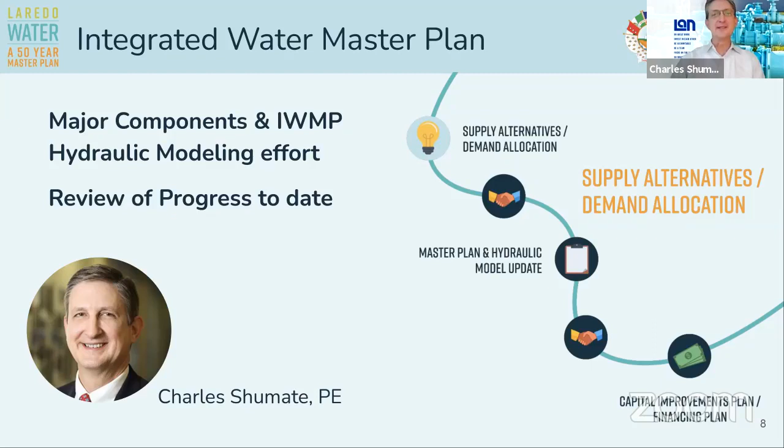Let's go on to the next slide. There we go. We'll talk a little about the major components of a master plan. I'm specifically going to talk about the hydraulic modeling effort, and then all of the speakers this evening are going to talk about the status of and progress on their tasks.

A little background on the city system and the current effort. The system originated or had its beginnings about 140 years ago now. It's a primary consideration, I guess, that the Rio Grande River is essentially the supply for the city. Groundwater gets only pretty limited use because it's limited both in quantity and in quality.

The current master planning effort goes back to 2011, which was the last published master plan, I believe. The 2015 update doesn't include all the aspects of a master plan, but it was a major update of the modeling efforts. And then emphasized in the current planning is that we make use of those Water Development Board planning projections for both population and future water demand. And if you're not aware, Laredo is in Region M of the state's planning effort.

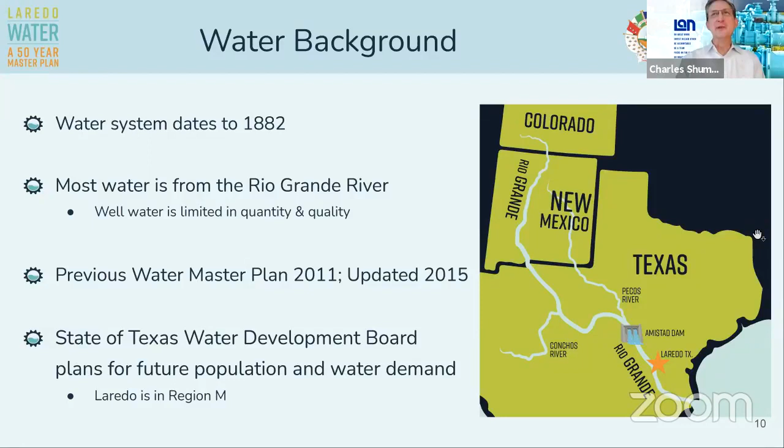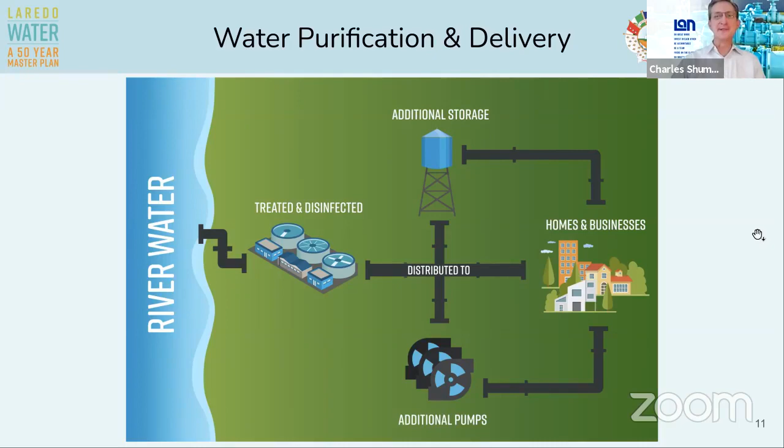And at the top there, you may also have additional storage out in the system. So in the city system today - and these numbers have changed in recent years with the El Pico treatment plant coming into service - the city now operates 2 surface water treatment plants. There are 8 booster pump stations, 9 elevated storage tanks, and with the 2 treatment plant service areas and 8 booster pump station service areas, there are a total of 10. Part of what helps define those service areas are some PRVs out in the system, and isolation valves also help form boundaries for those service areas. And then finally, just the piping out in the system - there's more than 1,000 miles of water lines that range in size from 2 inches up to 60-inch transmission mains.

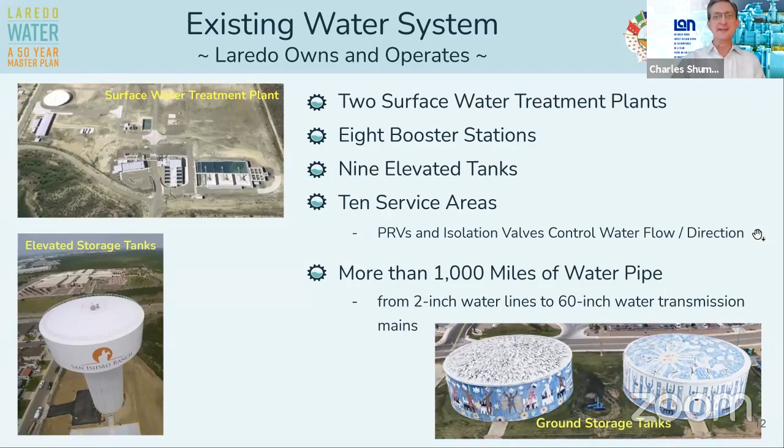When I start talking about hydraulic modeling, I'd often start with population and water demand, but Tom is going to pick that up here in a little bit as he talks about planning for the future more, and those population and water demand projections, and that need for additional water supplies.

But really, all a computer or a water model is, is a computer simulation of that infrastructure out in the system - both what you see above ground and what you don't see, with the water lines underground. It's a tool to identify needs, or kind of a what-if tool many times. If there's a disruption in supply, or a break in a line, or just not enough capacity somewhere, it allows you to test potential improvements - whatever the engineer can brainstorm or sees a need for.

With storage, it helps you locate where in the system it needs to be and how much storage. With pumps, it's about capacity and their operating or performance requirements - how much pressure do they need to provide. With water lines, again, it can be connecting from point A to point B and how large that line needs to be. And then operational changes can come out of the modeling effort as well - knowing when to turn pumps on and off, how they're controlled by levels in tanks or pressures out in the system, those kind of things.

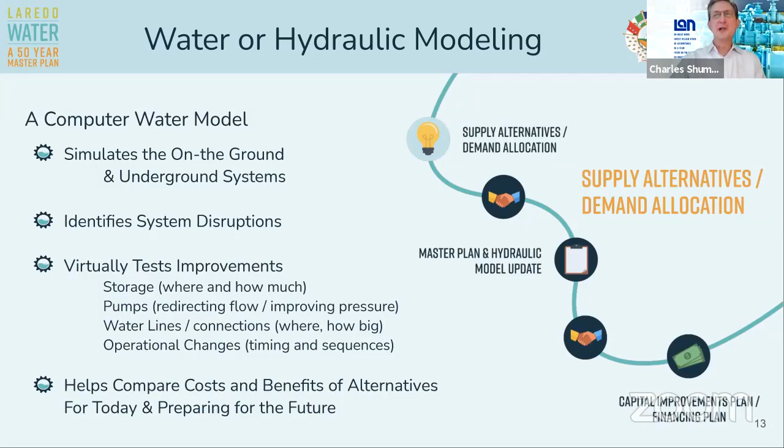So kind of, how did we begin? Steps we've been through - where are we now, where are we going? As I've mentioned, that 2015 model update formed the basis for where our work began. It did take some updates, both in terms of addressing development in the system in the last 5 to 6 years - so adding some pipes in those developments, as well as new demand in the model. I mentioned changes that have come about with El Pico coming into service, so there were booster pump stations in the model that no longer need to function.

A major step or task then in the overall process is verifying that model - just making sure that model results match what you see out in the system day to day. And you do that just by looking at flows and pressures in the system, comparing SCADA data for tank levels with model results. And a big part of getting those things to work and come into agreement is just getting pump controls right.

Once you have a verified model, then you take that and apply it to the existing system - the way the system operates day to day, and peak days especially, and all of its shortcomings potentially. What we see agrees with what city staff tells us about needs out in the system, from growth in South Laredo, just challenges at times to refill storage. And another thing we look at is just, are there ways we can simplify operation or make things more efficient? And then finally, again, kind of back to cost - we want to be able to identify those efficient and affordable improvements.

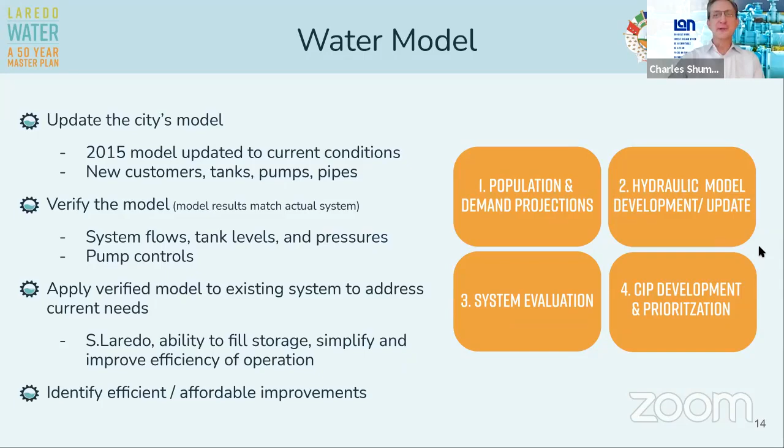So what does this all look like when we're finished? Well, the final master plan report really just documents the things we've been talking about. It goes back to the development of the model, bringing it up to date, the needs identified in the existing system with capacity, pressure, and storage. Then documentation of proposed capital improvements and the comparison of alternatives, what won out as the best solutions to the needs, both short-term and long-term, and finally developing those conceptual or planning level costs.

That's a key part of the comparison of those alternatives. You want things to be both dynamic and updatable and actionable, things that city staff can go then and begin to implement.

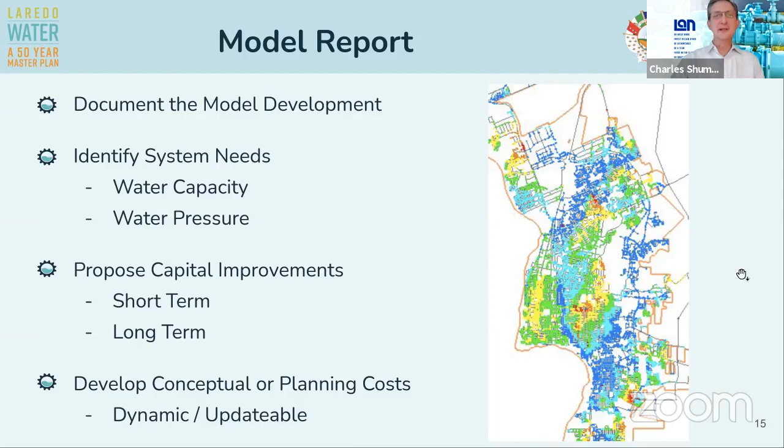There's also the likelihood of potential plant improvements. Those are things always in the city CIP, so meshing those with model results and getting into agreement about priorities for those. And then also pump station improvements, some of that's about operation, and some of it's really about getting a better handle on and control of getting enough supply to booster pump station facilities where it's needed.

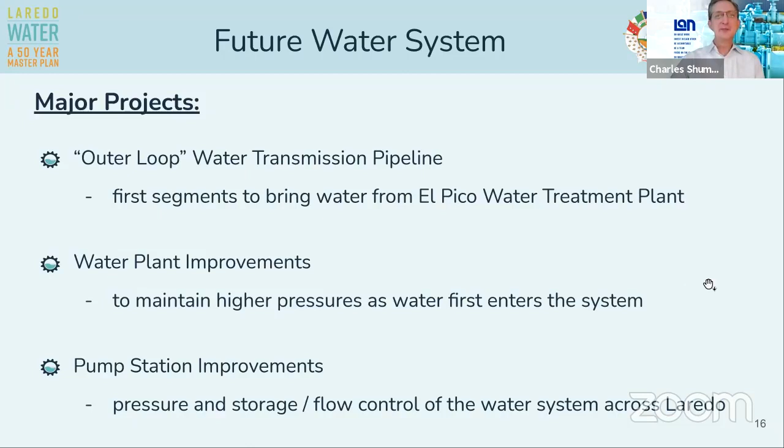And I believe that brings me to the point where I hand it back to Tom, who's going to talk about water supply alternatives.

Okay, Charles, thank you. I appreciate that. I've got some help today from Tom Mountz, and Tom has done a lot of work on a number of water supply alternatives. Also on our panel is Mike Thornhill of the Thornhill Group. He is a groundwater hydrologist, and when we get to talking about the groundwater alternatives we've looked at, Mike will be available to help us answer questions and get through that with the information you need to know about groundwater alternatives. As Russ mentioned, the Laredo—and I apologize, Russ, for not recognizing you, that's a major slip up, but Russ is very valuable to our team.

But as he mentioned, the Laredo integrated water master plan goes beyond the typical standard master plan in that it looks at water demands in the future that will be needed to meet the growth of Laredo, as well as an alternative to look at what happens if Laredo were to lose its primary water source, which is the Rio Grande. So we'll be talking about that in terms of the alternatives.

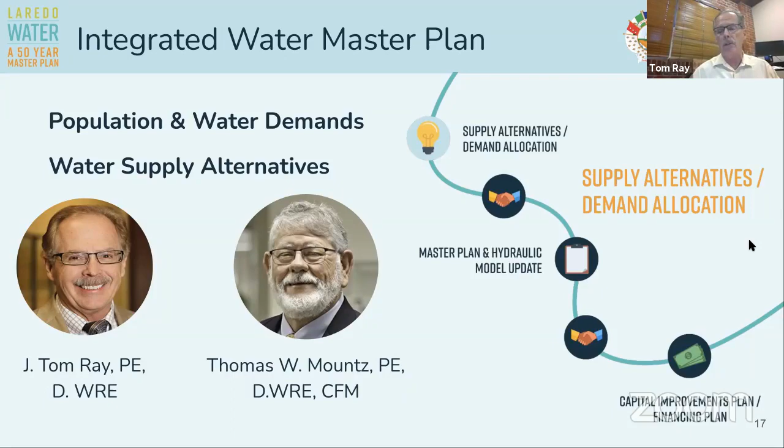Let's move on to the next slide, which gives you a little bit of background about where we got our information. What we were using for population and water demand is information from the Region M water supply plan, the regional plan for this area. It's part of an overall statewide effort that's been in place since the mid-90s. The city, RIA, and others are actively involved—RIA is actually a member of the Region M Water Planning Group, and they've had great input in the alternatives included in the plan, and have also looked over some of these numbers that we'll be presenting in just a minute.

We did gather information from existing water supply sources, with documentation and references as well. We looked at projected demands in two categories, which we'll speak about over the next couple of slides. First, the supplemental water supply goals for the city—that's the amount of additional water supply needed by the city to meet its growth needs through the year 2070, a 50-year projection of the city's growth, which is very typical, very standard practice. Not many cities achieve that as well as Laredo, but that's the supplemental supply goal we'll be looking at. The other is emergency supplies: if the city of Laredo loses its main source of supply at the Rio Grande, what sources could they call on to make it through an interim need until the Rio Grande is reestablished?

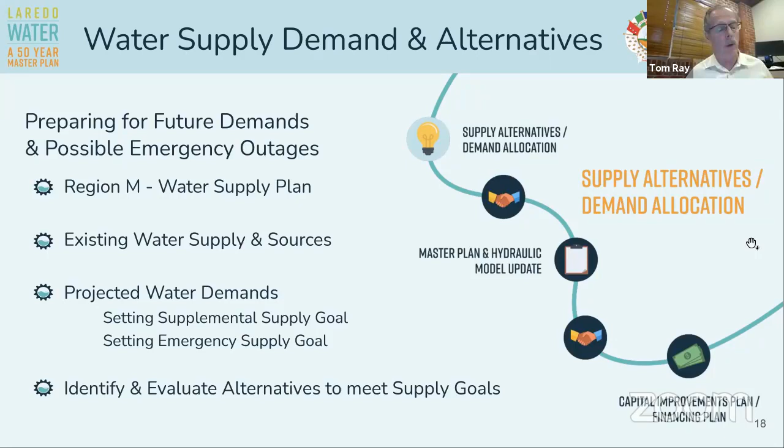So looking at that, we've identified some alternatives. I want to go through those with you now. If you'll take the next slide, please.

Okay, this is the population demands straight out of the Region M plan. Gene and his team have done a very good job of illustrating the growth that we anticipate for Laredo, and it's significant.

We are starting here in 2020 with 300,000, and then moving out to 2070, you see it's well over 600,000. So it's going to double in population growth by the year 2070, again, out of the Region M plan.

Next slide, please. This is kind of a busy slide, and I'll try to walk you through it, but it's important to know: is there enough water supply available to meet this significant growth going on for the city of Laredo? The answer is that the city has done a great job of building a current supply that is well in surplus of current needs.

Let's go down to the water supplies, that next to the bottom line, that 61,827, that's in acre feet. In just a minute, we'll explain acre feet. The other term I'll use for water supply is million gallons per day, but we'll talk about those in just a minute. Just keep in mind that 61,000, almost 62,000 acre feet is the amount of current water supply that the city has accumulated.

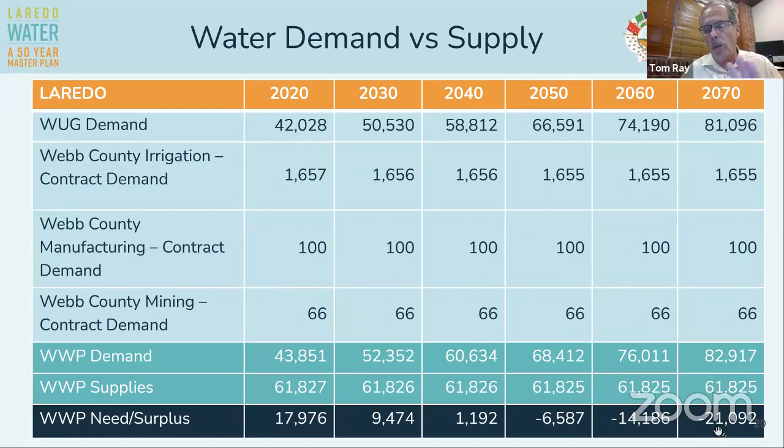All right, next slide. Continue to want to emphasize this. It's important that you know we're looking at two supply goals. One is emergency supplies, a loss of the Rio Grande. The other is supplemental supplies to meet that additional water supply needed for the growth beyond the year 2040.

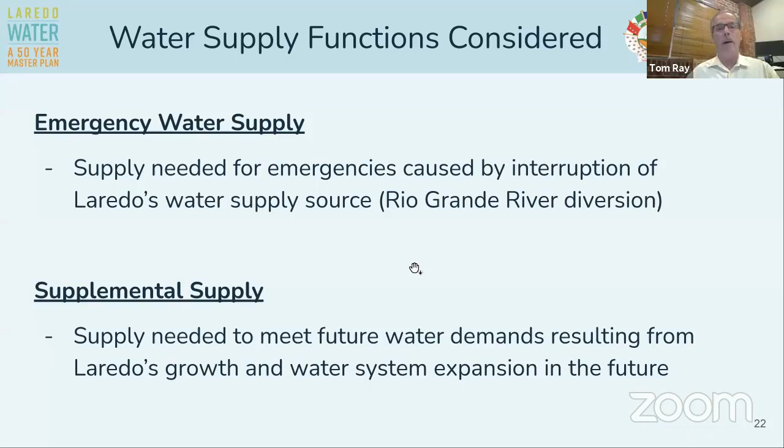Next slide. Here it is again, the current supplies for you. That's almost 62,000 acre feet. That is 55 million gallons a day, more or less. And that should meet our needs, the city's needs, through 2040.

And then if you look down, Laredo is also preparing for those future growths beyond 2040, as well as emergency outages. The graphic on the right, Gene and his team put together, gives you an idea of how much water is in an acre foot. It's a term we use for raw water supply because it's a big number. It's a lot of gallons. As you see it there, it's...

326,000 gallons, almost 327,000 gallons. So it's a big number, it's a lot of water. We turn to that when we're talking about how much supply could come from a lake, how much supply could come from groundwater. Then when we start talking about a treatment plant, we usually revert to million gallons a day. All right, let's move on.

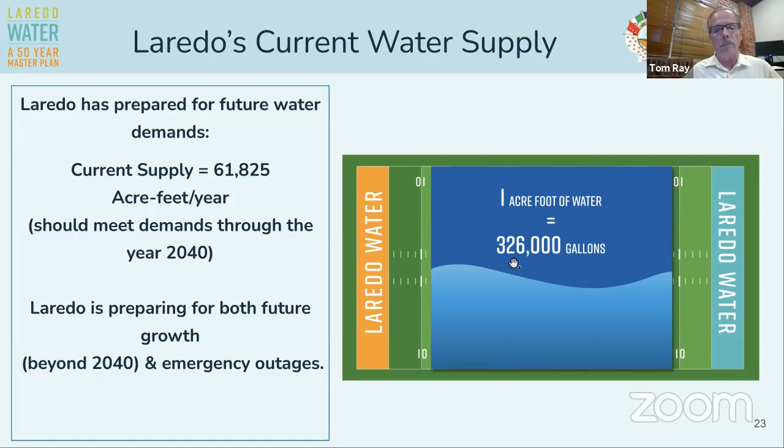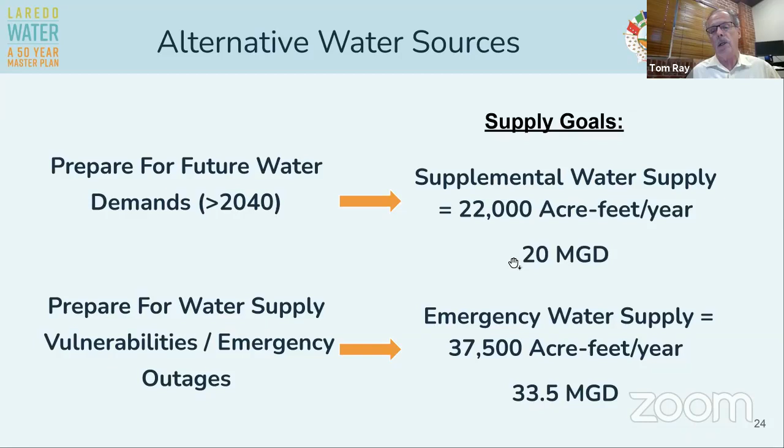Again, I want to make a point of the supplemental and emergency, but this time identify the amounts, the target amounts of supply goals we're trying to meet for each of those categories. Supplemental water supply is at 22,000 acre feet per year, or 20 MGD. And then the emergency water supply goal that we're using - it's explained and developed in the report as to why we're using that number - is about 33.5 MGD. You'll see those numbers in just a minute as we go through some of the alternatives.

All right, next slide. Water supply alternatives to meet those two goals. Over in the right-hand box, that captures the ones that we've looked at in some detail. It does not capture all of the alternatives that have been looked at in terms of possibilities. The report, when it's completed, is going to have a number of others referenced, but none to the detail that these will be presented. So we want to make a point of going through these with you, to make sure you get a good understanding of what we're looking at. The water supply alternatives, importantly, can function as either supplemental supplies to help with that future growth, or as emergency supplies to help with the emergency need that we talked about. So we're going to be looking at Lake Casablanca.

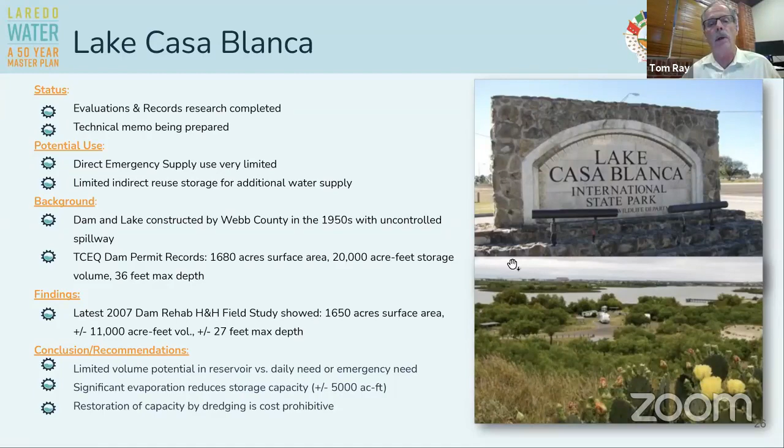Next slide, please. This is the first of several groundwater alternatives that we looked at. Again, Mike Thornhill with the Thornhill Group is on the panel. Mike, if you would, I'm going to move pretty quickly through these alternatives now and try to catch up some time. But if I leave something out, if you see a significant point that needs to be made, please chime in. I would appreciate it.

We've looked at this one pretty closely. This is a groundwater supply in the Carrizo-Wilcox, which is an aquifer, an underground storage of water of decent quality. That still needs to be further evaluated, but it should also have decent water supply quantity, and we're still looking at that. Preliminarily, for purposes of this master plan, we think it has two aspects: significant water supply, about 22 million gallons a day, and the ability to develop up on a peaking basis where you pump more than you would under an average day use.

You peak, you use more, about 1.5 times more, and that would be 33.5. That meets the emergency supply goal, but this supply would only be for 243 days. That's a significant period of time, though, and so it should be considered sufficient to bridge the gap if we have an outage of the Rio Grande.

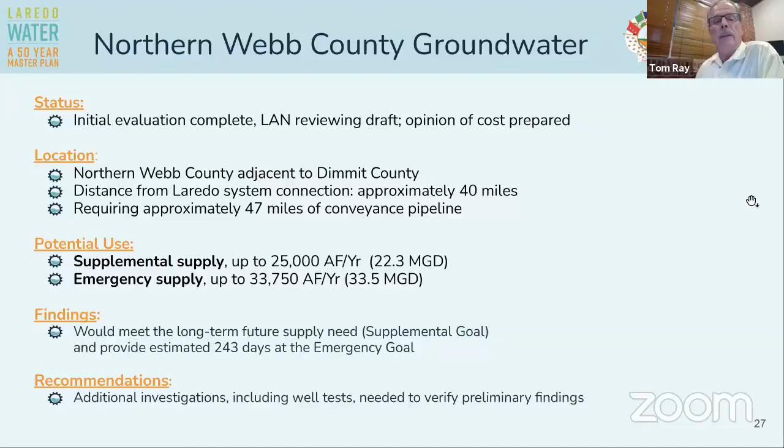Brackish groundwater exists, and Mike can help with this as well, but brackish groundwater exists in Webb County and throughout, even within the city limits of Laredo itself. The Water Development Board has identified these areas, the production zones, as they call them, in Webb County. However, and this is the point to take away, even though they're in close proximity, the quantity is very limited and the quality is very poor. In fact, in most, I guess in all cases, this brackish water supply would require advanced treatment. Quantity-wise, bottom line, it will not meet our emergency or supplemental water supply goals.

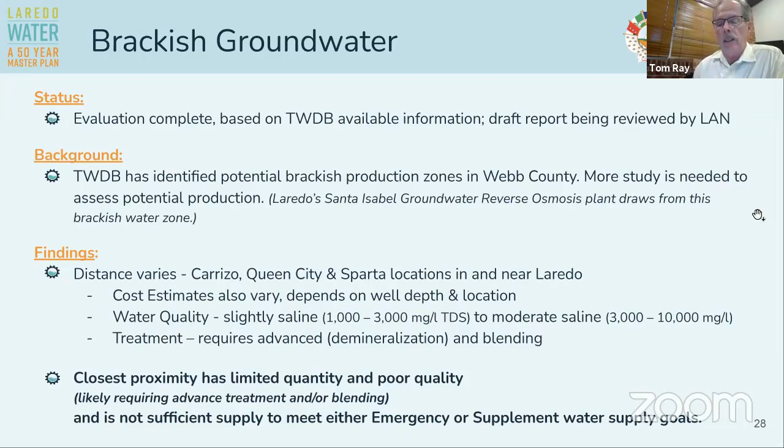And unless Mike has a comment on that one, I'll move on to aquifer storage and recovery. If you're not familiar with it, this is a technique that came in. It's not a water supply source per se; it's a way of using the water supply that you currently have better.

What that means is you take the water supply you generate on an average basis, particularly during low demand times. You take the water that your plant could develop, your water treatment plant could produce, and you take a portion of that and store it underground, in an aquifer. Then in the summertime, when you have higher water demands, you recover it. Now, it's a very simplified explanation, but that's essentially what it means. And the city, to its credit, way back when this technology was emerging, had a firm, an engineering firm, look at aquifer storage and recovery.

The findings weren't very positive. There's some issues with the aquifer itself within the city limits, including low injection and recovery rates, which makes that type of application difficult. The water quality is also a problem, and it wasn't picked up as part of the Region M water plan. So our findings are that based on these prior extensive studies, ASR supply is not expected to meet either the supplemental or the emergency water supply goals.

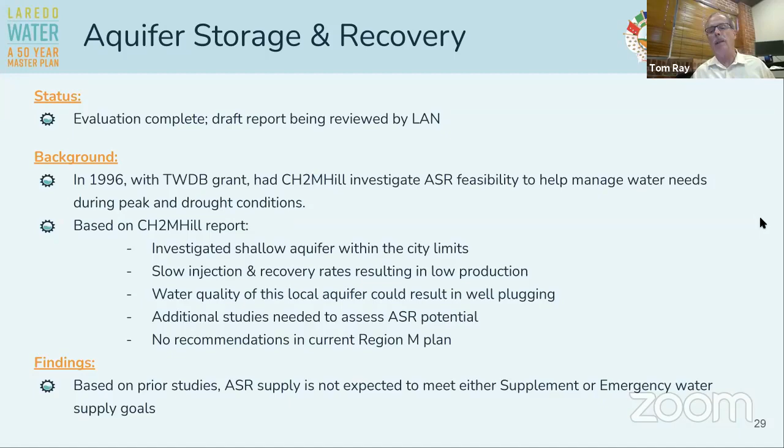All right, Mike can help me out with this one too. This is Mike's graphic, and there's a lot on this slide, but the primary thing I wanted to show is these imported groundwater supply projects. These are outside of Webb County, beginning with the Dimmit County supply, which is about 70 miles away as the crow flies. Then there are a couple of projects in both Kinney County and up into Val Verde County, which can function together, about 150 miles away. There's a trade-off between distance to the supplies and the volume available. The supplies that are more proximal have less quantity, but as you move out to 70 or 150 miles, that quantity increases significantly.

Let's show that on the next slide, if we could.

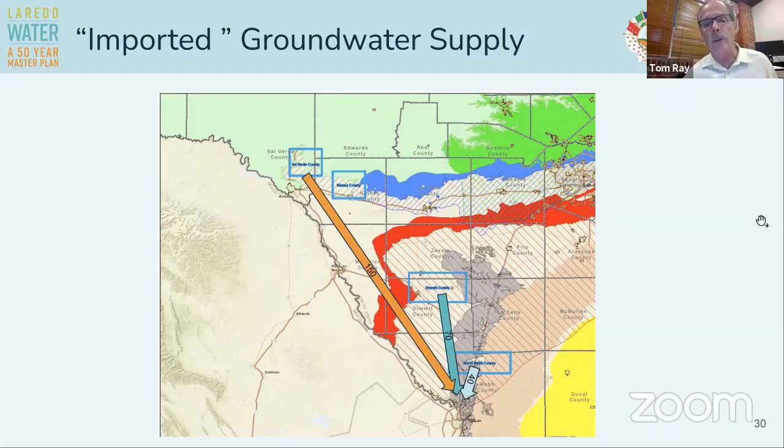Here it is. Dimmit County at 70 miles, and Kinney County and Val Verde County both at 150 miles away. 40 million gallons a day available on an average, continual basis from the Dimmit County supplies. These are estimates; to actually determine better what quantities are available, Mike and his team would have to go out and do field tests and look at the aquifer itself in specific geographical areas. There's 22 MGD from Kinney County, but that can be combined with Val Verde County, which is nearby, so you could add that 22 to the range of 40 to 90 million gallons a day.

It's fresh groundwater, good quality, and would only require blending. So these are the imported groundwater projects we've looked at and will continue to look at, and they'll be thoroughly evaluated and reported on in our master plan.

Mike, any comments on imported groundwater? I don't think so, I think you covered it well. The Kinney County project, the 22 MGD, is based on a current permitted amount with the local groundwater conservation district, though I don't know where export permits stand. Val Verde County does not have a groundwater conservation district, and there are political and PR issues involved with where that water comes from, with the springs and things like that. Although the amount of water represented was modeled to not decrease spring flows below their historic low at San Felipe Springs.

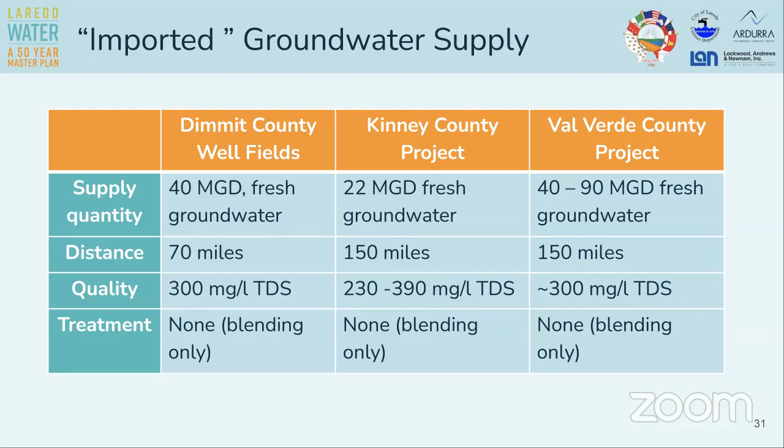Good points, Mike. Just a reminder for the audience that there are a lot of details involved in all of these alternatives. We're making this presentation just to get them out in front of the Laredo audience and let you see what we're looking at. The report itself will go into more detail, but at the planning level. Next steps would involve more detail on actual conditions on the ground. Next slide, please.

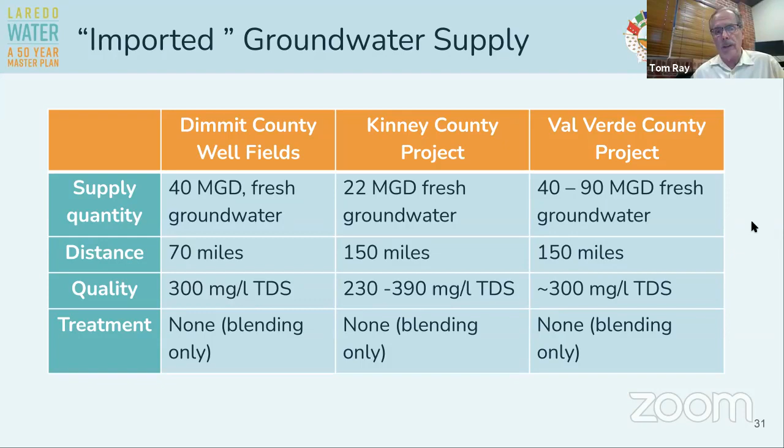Very good. This is one I think the city of Laredo and its staff should be proud of. It's in the Region M plan, a Laredo reuse project where you take treated effluent from the wastewater treatment plant, put it into the raw water supply, and it gets treated again, don't worry. It's not a significant amount of water, but it's enough to be helpful, and at the cost we'll show in a minute, it's a logical and good thing to do. It's water conservation, water that would otherwise not be available to the city.

The Region M plan identified bringing on this reuse project in two phases: one in 2040, recall that's the pivot year when additional water supply is needed over the current amount the city has, so 3 MGD could be very significant in bridging that gap. Then another 6 MGD coming on in 2060. It is cost effective, there's been excellent planning done, and it's in the Region M plan. It's not one we look at to meet our supplemental or emergency goals, but it's one we want to add, since it makes sound water management sense to bring on this reuse project.

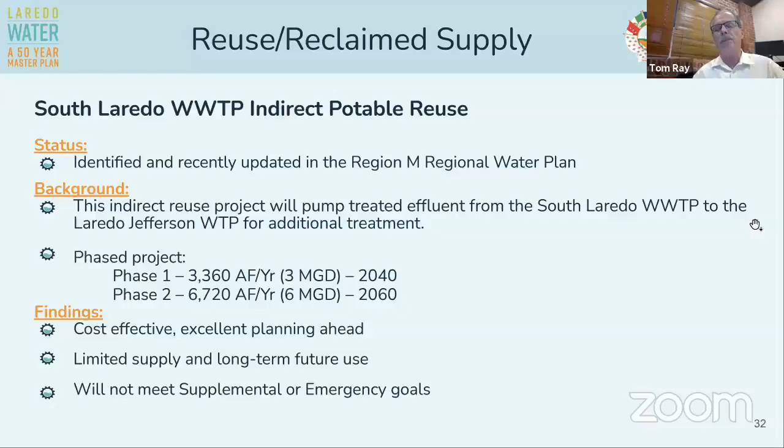All right, let's go to the next slide. What else? Oh, now this is the Rio Grande. And again, the Rio Grande is kind of the backbone of Laredo's system, so it's never out of the picture.

Kirk Kennedy is very knowledgeable of the Rio Grande and its unique water rights system. Also, one of the city attorneys and our council are very familiar with this. We've talked about the Rio Grande and the need to continue looking at availability of water rights. If irrigation districts or others have water rights they want to give up, they give them up for a price. If that happens, the city is very diligent about looking into and considering the purchase of those additional water rights.

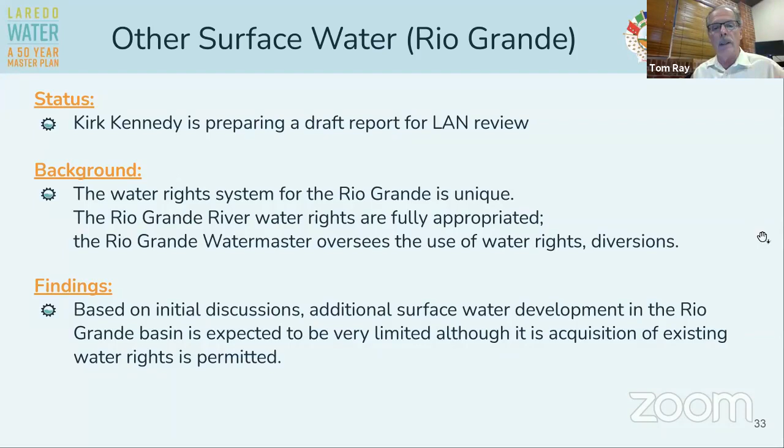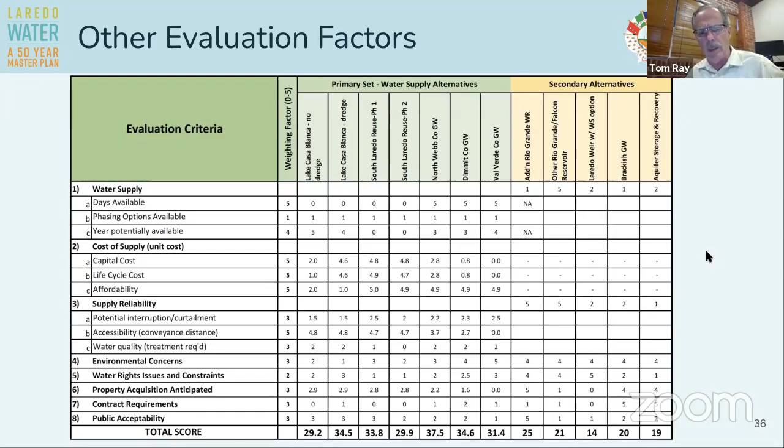Let's see. Next slide. I am. You got 4 slides left, Tom. I've got what? About 4 slides left. Oh, wait a minute. No, yes, but I'm going to stop talking.

I'm done, and I want to introduce a very important member of our team, with lots of experience in dealing with water issues and water investments, being able to project what's needed to have a sustainable, robust water system. That's Lisa Latu. Lisa, I'll let you take it from here.

Thank you, Tom. Thanks, everyone.

We've given you a lot of great and detailed information about the current state of the City of Laredo water system, as well as some of the things we're looking at for the future. One of the most important things is, of course, that all of these projects have a cost and can't be immediately deployed to help us out.

The City of Laredo Utilities Department has been developing and implementing projects to replace old infrastructure and bring water and wastewater services to new development for years. So the next piece of our master plan project is to assist with that by sorting through the projects already identified, looking at new projects and new needs from the water model, as well as these future and emergency water sources, to assign a deadline and a cost for each project, to help judge the impacts and benefits, and to pick the best projects for the best price and design a sequence for the next 20 years of work.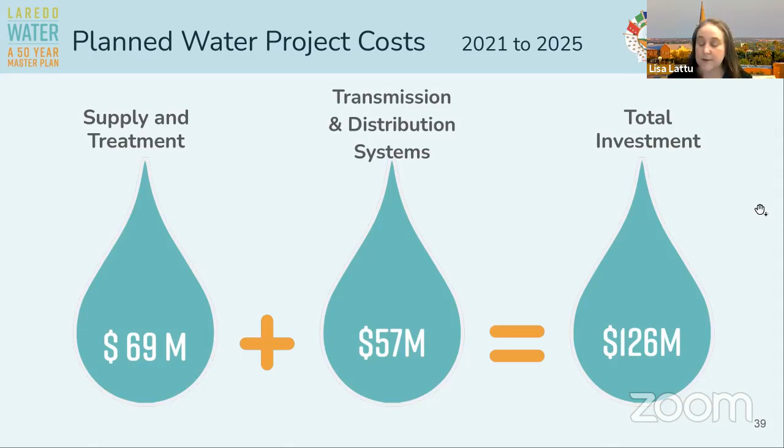This next slide is a little graphic to sum up some of the projects already planned for the next 5 years, about $126 million already. It's split almost $70 million for supply and treatment, and the remainder, $57 million, for water line projects, new repairs, new lines, and other projects like that.

And this is some of the projects that are already ongoing that you might be familiar with: El Pico, of course, and the Lyon Street Booster Station. I think the ground storage tank demolition and replacement is kicking off. Downtown water line replacements, the outer loop project that Charles had mentioned, and other improvements at other facilities and neighborhoods across Laredo. This is probably a test for me to see if I can say Cuatro Vientos, Northwest, the East Corridor, Del Mar, and the airport areas.

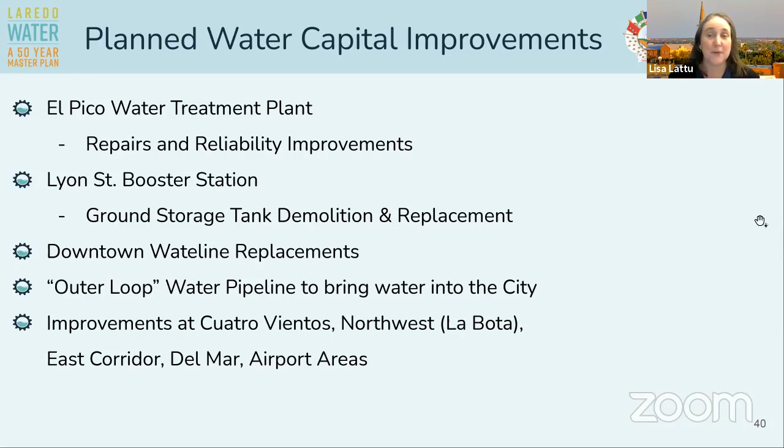Thanks, Lisa, and thanks everybody on the LAN team and staff that has participated on the water side. And again, as Russ had said earlier, this is an integrated wastewater master plan.

We're looking at a lot of things, and of course, once you use the water, you got to get rid of it, and that's the wastewater side. So for just a second, if this were a live town hall, we'd all stretch out a bit and get ready for round two, the wastewater side. That's going to be led by the team at Ardurra, who have been diligently working on this since January of this year. They started the wastewater master plan a little after the water folks did, so they're coming in hot and heavy to meet up with us so we can have this full project submitted to the city later this fall.

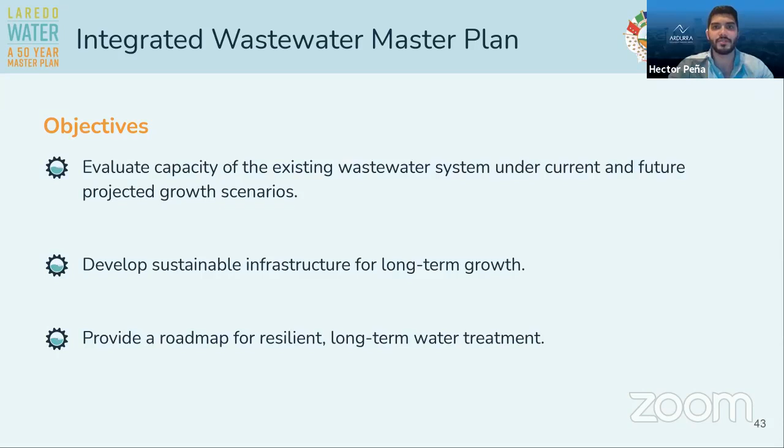And third, we aim to provide the city with a roadmap for resilient long-term water treatment. We're providing a capital improvement program, or CIP, for the next 50 years that the city can implement for a reliable wastewater collection system, serving the anticipated future population.

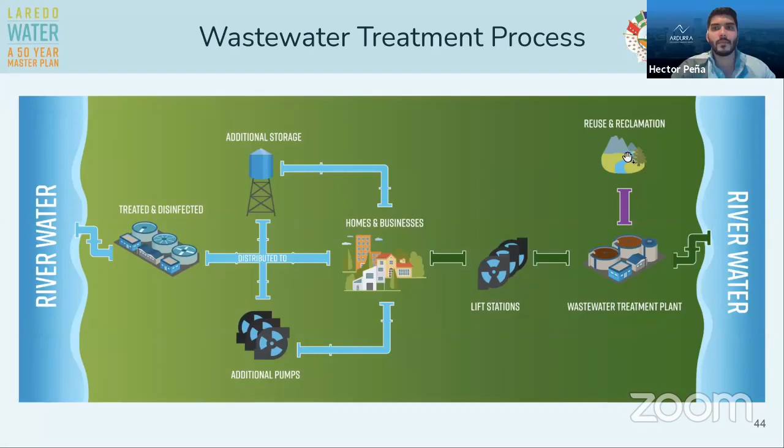After treatment, the water can either be safely released back into the river, or as shown here with the purple pipe, could be reused as non-potable water. Go to the next slide, please. All right.

To help visualize the amount of pipe, if we were to line up these 900 miles of pipe that make up the collection system, it would be equivalent to the driving distance from Laredo to Kansas City, Missouri. We decided to throw that fact in there just to put into perspective how complex the system is, how much pipe there is underground that we don't typically see.

But these 900 miles of pipe is what the city constantly maintains to be able to keep the system operational. These pipes range from 4 inches all the way to 54 inches, and as mentioned earlier, they collect the wastewater from every single home and business.

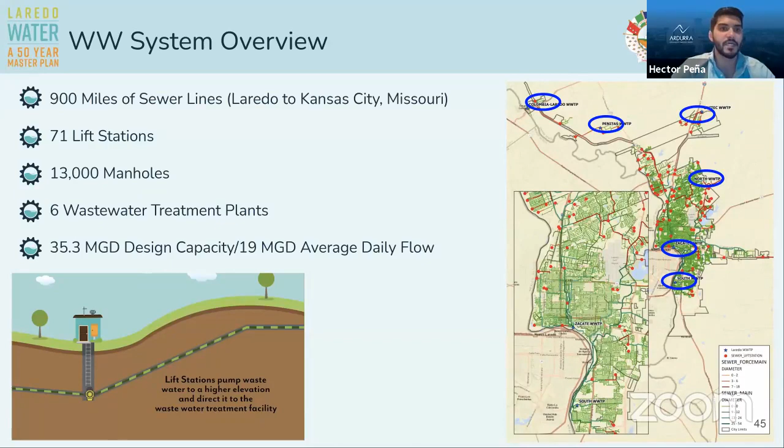And finally, the city owns and operates 6 wastewater treatment plants that were shown in the previous map, circled in blue. The design treatment capacity of all 6 wastewater treatment plants combined is approximately 35 million gallons per day, or MGD. Again, this is the capacity combined, but the actual flow that they treat, which is the average daily flow for all 6 wastewater treatment plants combined, is approximately 19 MGD, or 19 million gallons per day.

The next step in the process is called the secondary or biological treatment, labeled here as the aeration basin in green. Here, activated sludge, or the good microorganisms, are introduced, and air is pumped into the wastewater to feed these microorganisms so that they can eat the pollutants and achieve biodegradation.

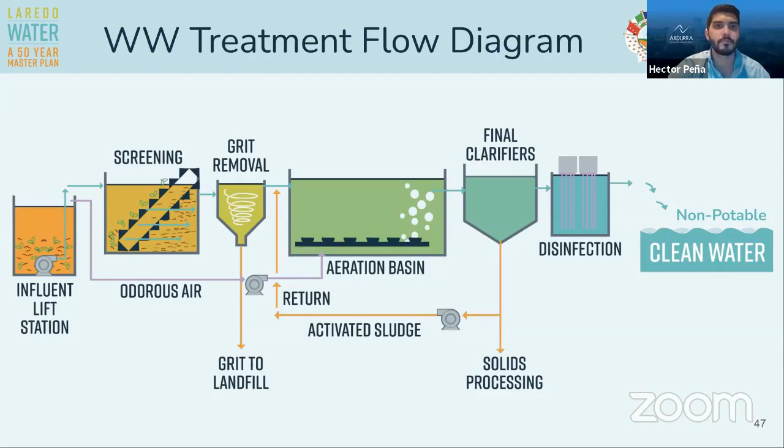Down at the left, we've got Unitec, located at mile marker 13, which serves an industrial area. Then we've got Laredo Colombia, which also serves an industrial area by the Laredo Colombia International Bridge. And finally, we've got Peñitas, which is on Mines Road.

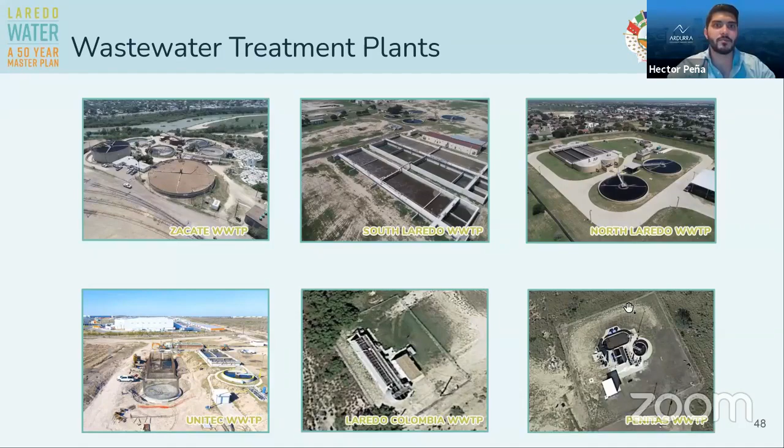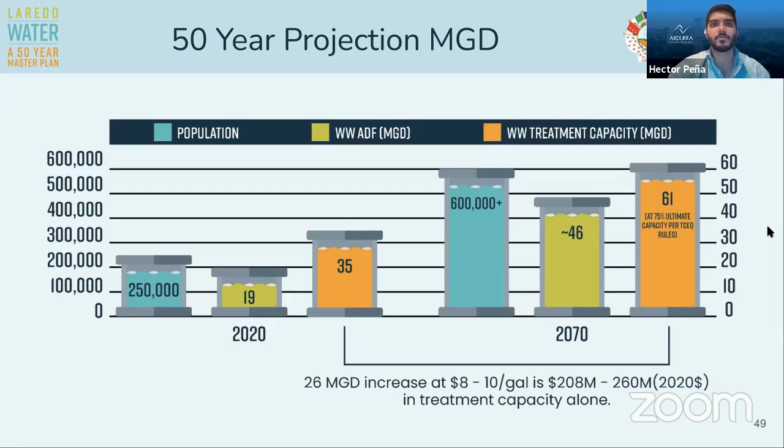So these are the costs for that treatment capacity alone. Again, this doesn't include any upgrades to the collection system. These are rough estimates because, as we'll see on the next slide, we're still not finalized with the wastewater projections. So these are early estimates, but they give a good idea of where we might be once we complete the tasks.

On this slide, we've got a diagram that shows our approach, or the process of how we're accomplishing the objectives that I talked about initially. It also shows where we are in the process. So I covered the initial steps of the wastewater master plan, which are highlighted here in orange.

The first step I covered part of the information that was collected from the city for the existing collection system and the treatment facilities. That also included the current wastewater collection system model, which was done in 2015. Then I touched at a high level on how we reviewed the design criteria and the level of service for the existing facility.

So the next couple of steps that we show here below, in parallel, is where we currently are in the process. And I'm going to allow Nacho Hinojosa from our Laredo office to cover those steps and what's next in the wastewater master plan.

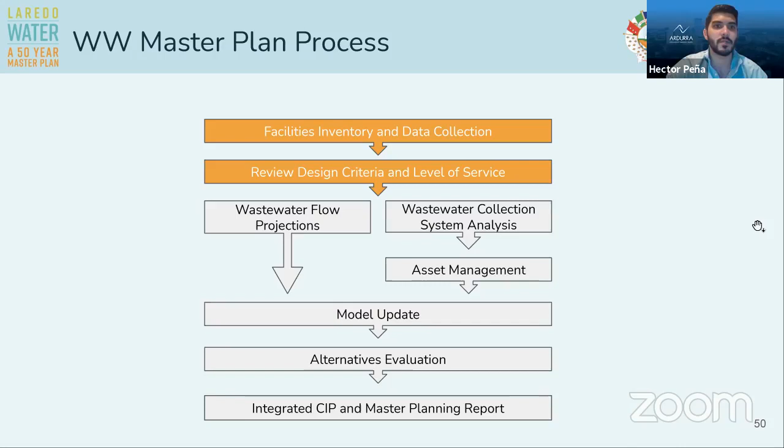Thank you, Hector. Thank you for the introduction, and I also want to thank Gene's team for allowing me to use my high school headshot for this presentation today. It's a much better version of me than my current version. But anyways, not sure we gave you special treatment, sir.

Thank you very much. So as Hector mentioned, I'm going to be covering where we are today in the master plan. We're running two parallel tracks: the wastewater flow projections, and the wastewater collection system analysis and asset management component. On top of those two items, I'll also touch on the existing capital improvement plan for the city of Laredo.

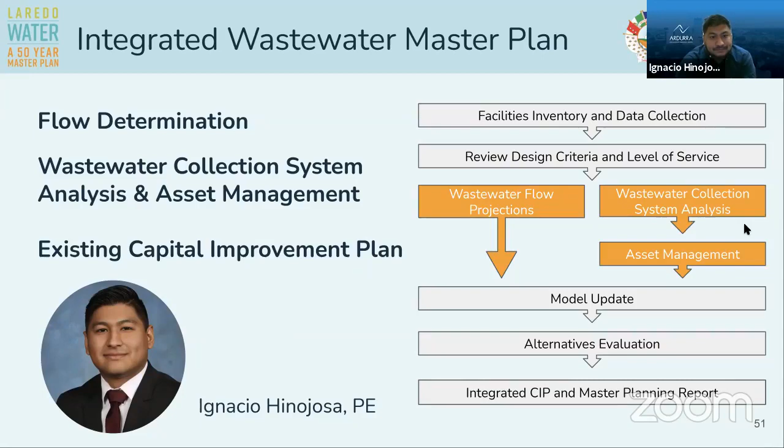So next slide. As I mentioned, one of the things we're going to cover is the flow projections, or flow determination. The three main things we want to get out of this: first and foremost, we want to set a baseline condition of the existing flow—the amount of wastewater coming from our businesses and homes into the wastewater treatment plants today.

And then we're going to take the population projections of the Region M plan and other tools to project these flows across 5 different planning horizons: 2030, 2040, 2050, 2060, and 2070—essentially every decade. And then we will use these flow projections to develop a 50-year plan for the city of Laredo.

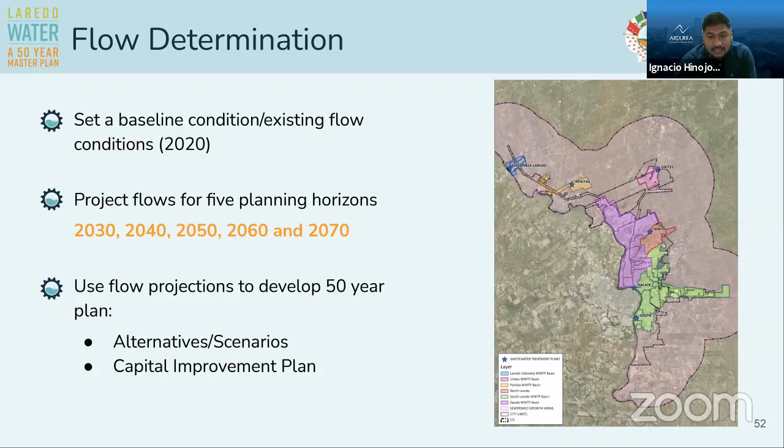This plan will include alternatives and scenarios of how the wastewater system will build out over this period of time, as well as a capital improvement plan that'll be attached to those scenarios. The city will be implementing this capital improvement plan as they go on through each decade. So, next slide please.

We want to break this down into flow determination with two different types: the existing, what we're seeing today. We first identified the existing sewer sheds and subbasins, represented in the graph on the right, color coded. For example, the Zacate Creek wastewater treatment plant sewer shed is in yellow. If you live in Mines Road or La Bota Ranch and flush the toilet, your wastewater travels all the way to bridge number 2, to the Zacate Creek plant. On the other side, if you live in Lakeside or around Lake Casablanca, your wastewater travels to Santa Fe or South Zapata Highway. It gives you a perspective of the system itself.

Once we identified the sewer sheds and subbasins, we developed an average daily dry weather flow, meaning no rain. We developed this for the entire city by sewer shed basin, shown in the graph, and per capita, meaning every resident. We mention no rain because during rain events there's inflow and infiltration, I&I, where rain infiltrates into the wastewater collection system through manholes and pipes. We want to remove that flow and capture just what we flush down the toilet, what we use to shower, and what goes down our sinks.

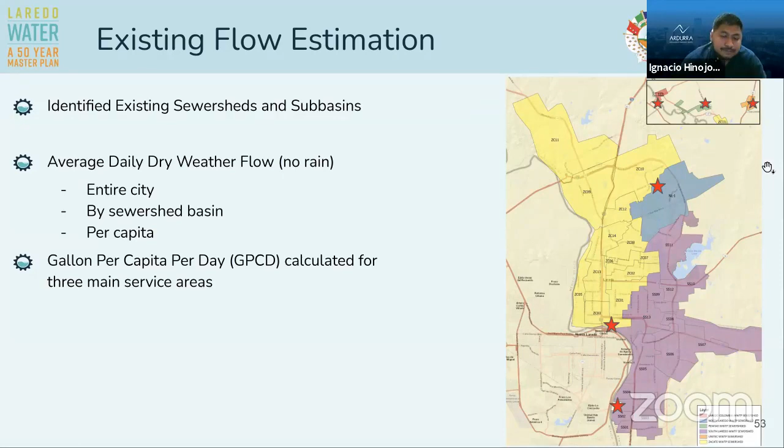It's important to use these tools because everything shown in green is the ETJ, the unincorporated areas of the city. Eventually the system will grow out as the city grows, and the system has to grow with it. So it's important to know these catalytic type projects so we can provide the correct infrastructure in different parts of the city as it develops and grows.

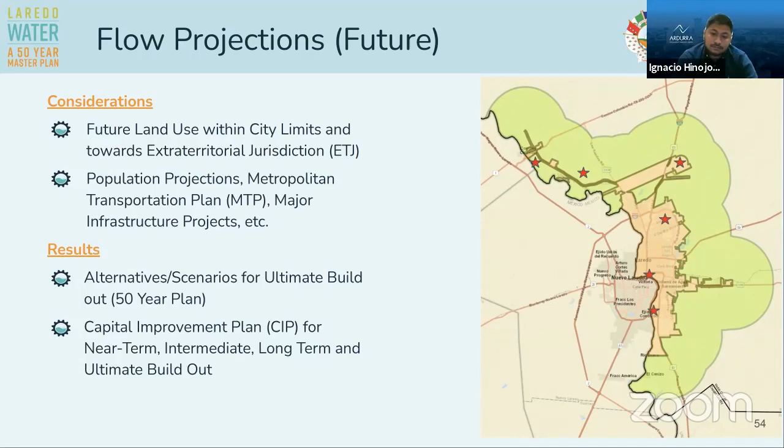What we want to take out of this, once we have those future flows, is to develop alternative scenarios for the 50-year plan and a capital improvement plan tied along with those scenarios.

As I mentioned earlier, there are two parallel tracks here. We're not only looking at flow projections, but also at what we have today, so we're doing a wastewater collection system and asset management portion for this master plan. As Hector mentioned, the graphic on the right shows your green pipe, which is all your sewer system in the city of Laredo. The red dots are your lift stations, and the dark red lines are your force mains.

What do we want to take out of this portion of the master plan? We want to first summarize the current assets and determine their life expectancy. Then we want to develop renewal costs for the current assets and use those costs to develop a long-term CIP for the city when we're talking about renewal.

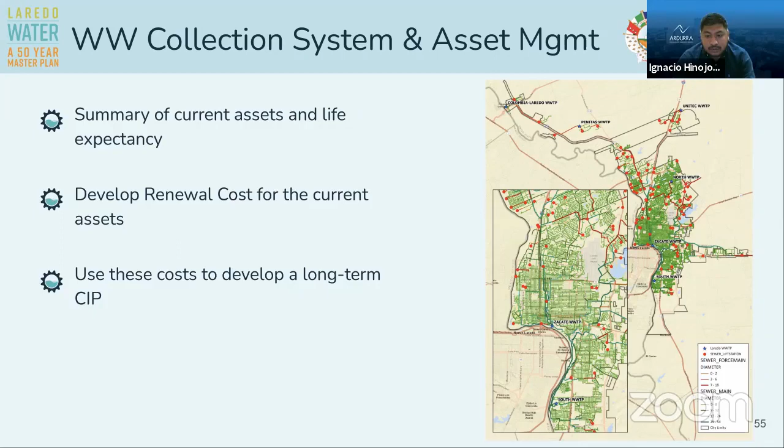Let me look around here. Maybe just Lisa, Hector, Ria, and myself weren't born when most of the system was installed, or at least half of it.

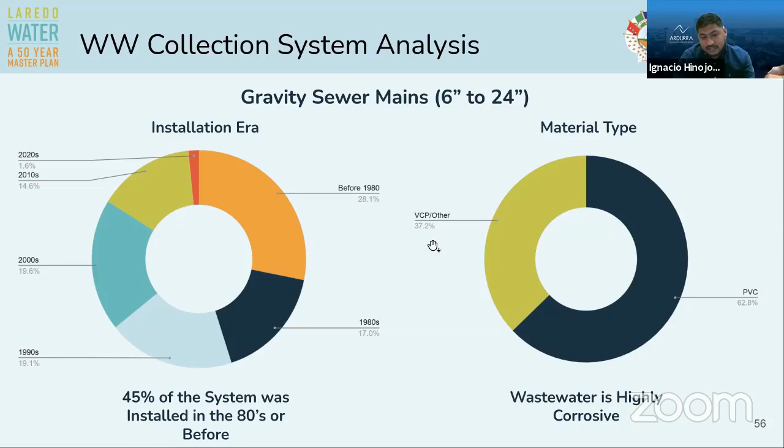On the right side we have the material type, which breaks down into two types. We have PVC, which is predominant in the wastewater collection system because wastewater is highly corrosive, and it's become industry standard to use green PVC pipe for wastewater collection systems. Then we have vitrified clay pipe, VCP, or any other type of pipe still in the system, which makes up 37%.

This is another slide geared towards the asset management portion of this master plan. As Hector mentioned, it's a bit complicated, but if we were to lay every wastewater pipe in line, we'd get all the way to Kansas City. Right now, 30% of our system has a life expectancy of 10 years or less. If we laid that pipe out, it would take us all the way to Austin, and those needs will grow proportionally all the way to Waco by 2070.

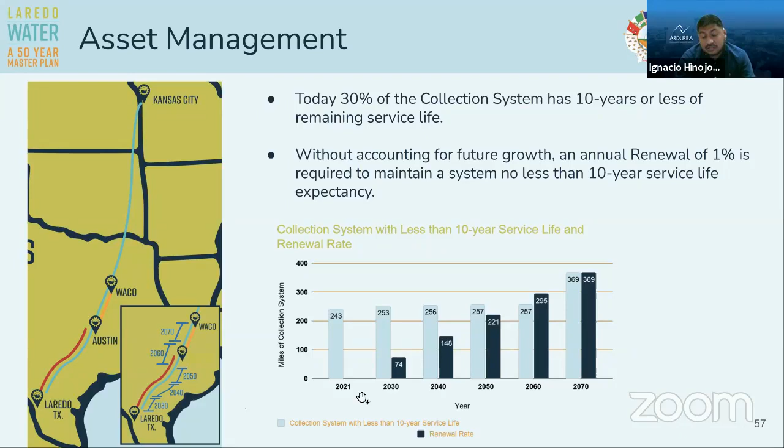To counteract that, we need to implement an annual renewal of 1% of the system, which is about 9 miles. If we do that throughout this 50-year phase, by 2070 we'll have a system where all pipe has a life expectancy of 10 years or more. So the renewal needs will be less if we renew the system at a 1% rate every year.

This slide is again geared towards asset management. To some, 1% may seem like a low number for renewal, and 9 miles may not sound like a lot, but I wanted to put things in perspective. This is a snapshot of the work orders for wastewater collections. I want to make clear that this doesn't include wastewater treatment, water treatment, or water distribution. Let me go through this so I can explain a little better.

What do we call a work order? When we have odor issues, sewer pipe breaks, or sewer backups, we typically call 311 and put in a complaint. The city assigns this to a work order, and the crews go out to assess it. We took weekly averages, monthly averages, and determined the number of work orders per year, translating to an average of 2 hours per work order. So the crews are out there 53 hours a week, more than a 40-hour work week, just addressing work orders, not including their daily routine.

I wanted to put things into perspective for us as citizens of Laredo, to understand what our utilities department does and how we will work with them to implement that renewal plan, on top of these issues we have every day with work orders.

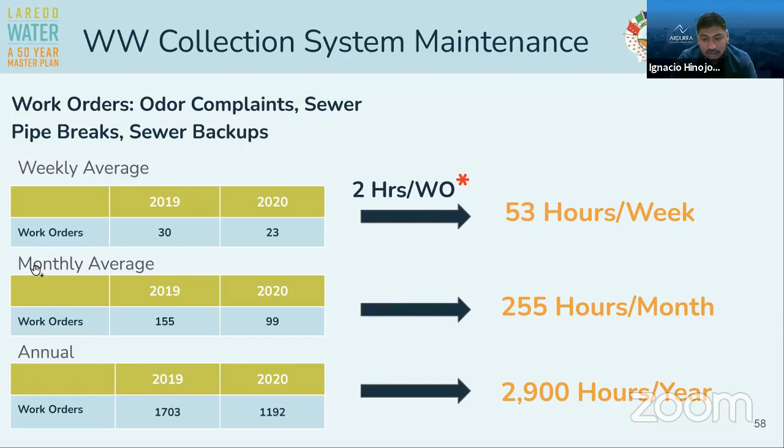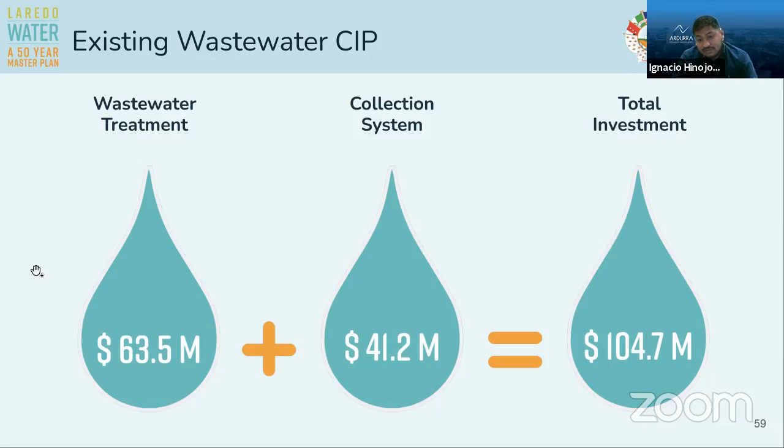Now that we've talked about asset management, let's talk about the existing wastewater CIP—Lisa touched on the water side. On the wastewater side, we have allocated $63.5 million for wastewater treatment projects, everything inside the fence for the plants. On the collection side, covering pipes, manholes, lift stations, and so forth, we have $41.2 million attributed, for a total investment of $104 or $105 million.

This is the second to last slide, and I'll walk you through the next steps of this master plan. We've gone through the facilities inventory, reviewed the design criteria and level of service, and gone through the wastewater flow projections, collection system analysis, and asset management. Now we're ready to move on to the model update. We'll take all the information covered today, input it into the model, start evaluating alternatives, and then develop an integrated CIP and master planning report for the city to adopt and implement.

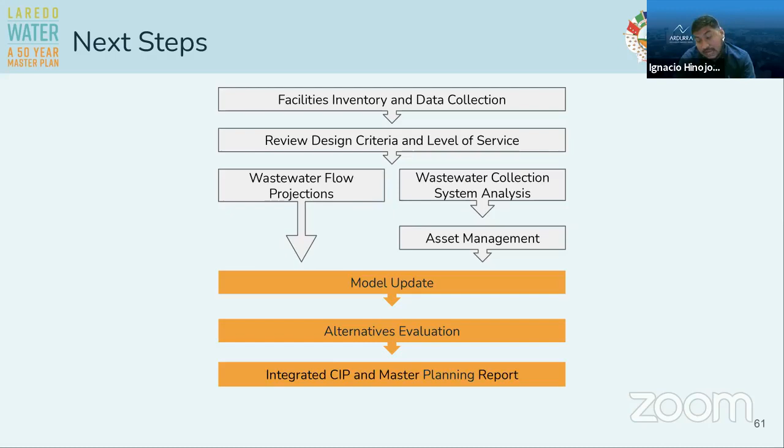And with that, I think I'm done. We're done here. You did a good job there. Thanks, I'll let the old guy here take over for a second.